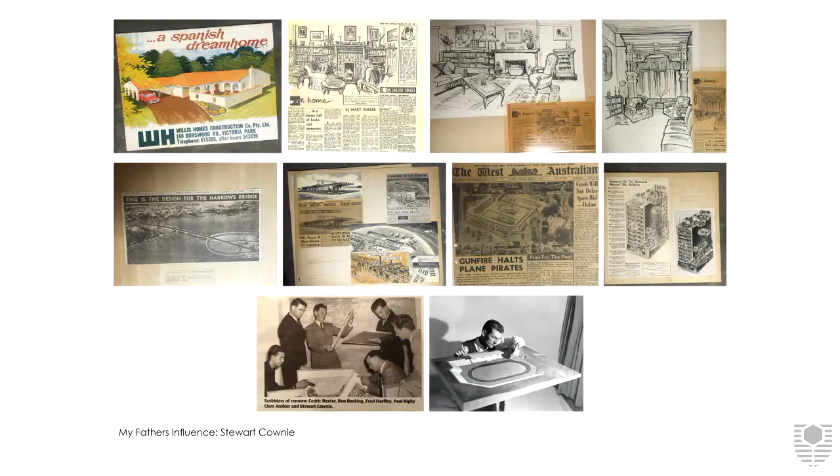The newspaper's art department included the political cartoonists, which meant that I had the honour of knowing personally the political cartoonists of the newspaper over the years. My father ventured into his own side career as a cartoonist with his Rodney series that he provided to an American newspaper for a time.

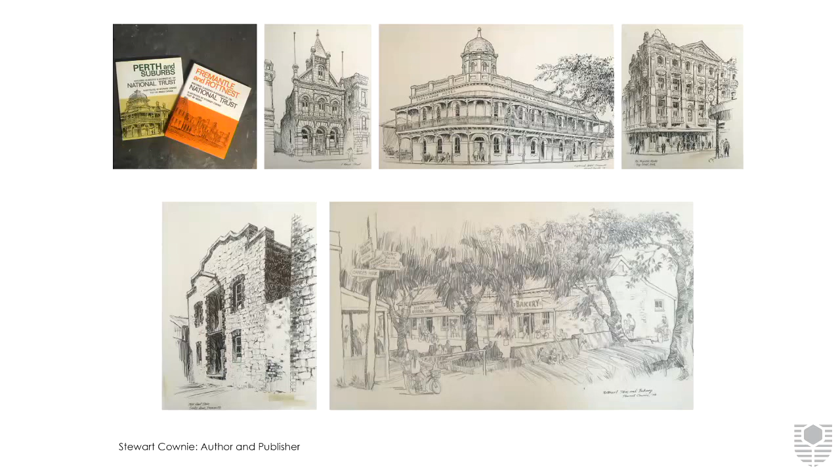Outside of my father's day job, he was constantly painting and holding art exhibitions. This took us to many country towns. He produced a series of books containing his pencil and ink drawings of historic places of Perth, Fremantle and Rottnest. He loved to research projects before he commenced the artwork.

When I was 6, our family travelled to Europe by boat for a holiday. I have many memories from this trip, or perhaps I can just remember the many post-trip slide nights looking at our travel photos.

Jumping forward to my days studying architecture at UWA, my first car, my first real job during the summer holidays as a brickies labourer, where I gained first-hand experience of construction sites. A few surfboards, a few student performances and competitive dress-ups. A memorable 21st birthday hippie-themed party.

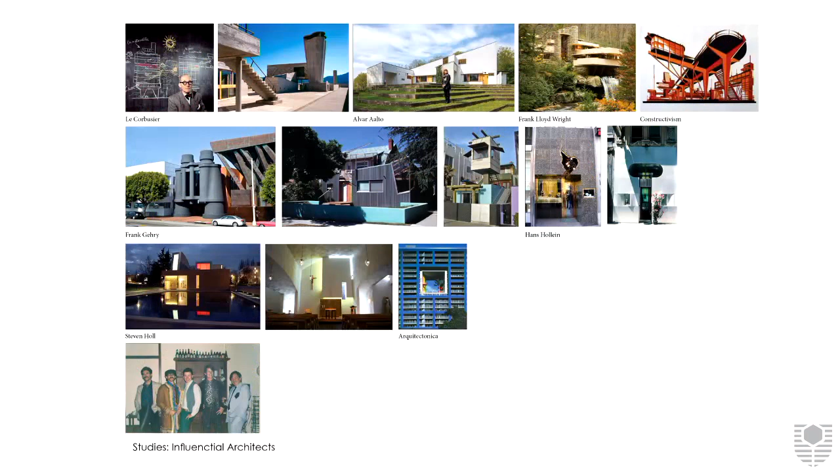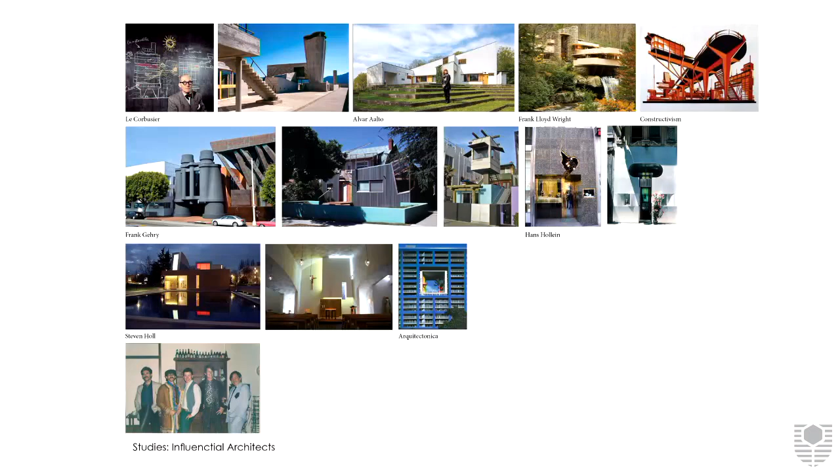At a time unlike today's endless supply of photos of architectural projects, I was influenced by books on the works of Le Corbusier, Alvar Aalto, Frank Lloyd Wright, and that of the Russian constructivists. I clambered over new periodicals to catch images of new work completed by the likes of Frank Gehry, Steven Holl, Hans Hollein and Arquitectonica. More dress-ups in my first job as an architect's office on finishing my studies, where I worked for 1 year before heading off to work in London.

5 fun-filled years based in London, working while taking lots of short breaks to travel. I was fortunate enough to work in a practice in conjunction with the architect Ian Ritchie. Ian started his own practice, Ian Ritchie Architects, in 1981, some 5 years earlier than my association, and earlier again at the office of Norman Foster.

At the same time, he had co-founded the design engineering firm, Rice Francis Ritchie, who were responsible for the bioclimatic facades of La Villette Sciences Building, the Louvre Pyramids and sculpture courts with I.M. Pei. Ritchie's fascination with lightweight structures was evident in the project on which I was working, Hermitage Riverside.

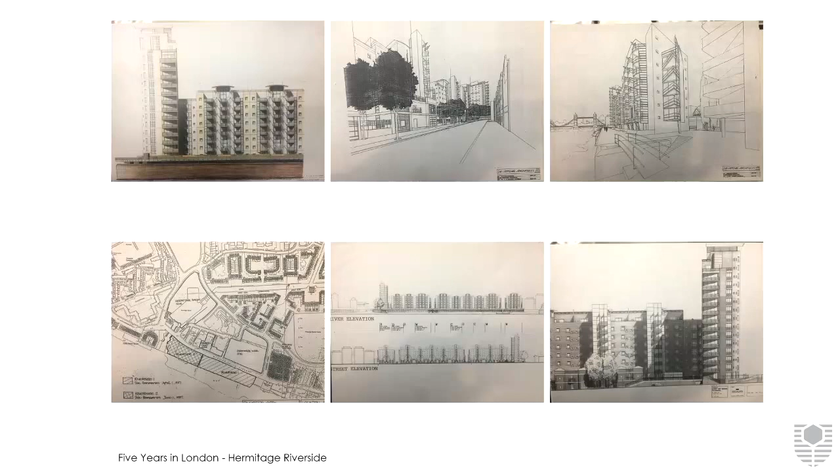The building was a residential apartment building on the edge of the Thames in central London, in which all of the lightweight balconies were suspended from above on suspension cables. We worked on this project from the design development to the end of the documentation, and unfortunately it was not built. What was interesting to me about this experience was the determination to not deviate from the design goal and Ian Ritchie's seamless working relationship between architect, engineering and industrial design.

I attended the World Architecture Festival in Amsterdam last year, where I had the opportunity to sit in on one of Ian's presentations to juries, on the Royal Academy of Music Recital Hall, which he completed earlier last year. It is the most exquisite building carved out of leftover spaces between historic London buildings.

After his talk, I reminded him of his project on which I had worked all those years ago. He remembered the project and very kindly said that he remembered me. I don't think he actually remembered me though, really.

Experiencing work in London was broken up with partying and lots of short breaks. Double denim, London digs in Brixton, and the beginnings of a romance that was to reignite later in life. A 4-week trip through Morocco and a crazy 5-week trip in my combi with 4 friends through France, Spain and Portugal. Back to work, this time on the proposed Hyatt Hotel and Conference Centre in Nairobi.

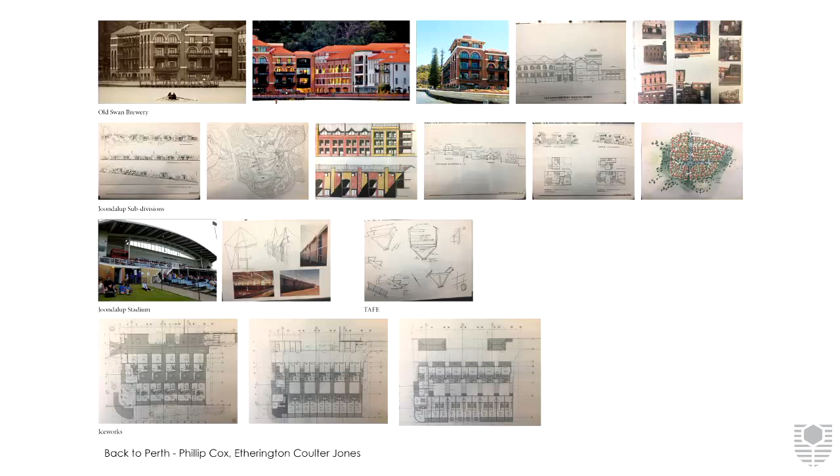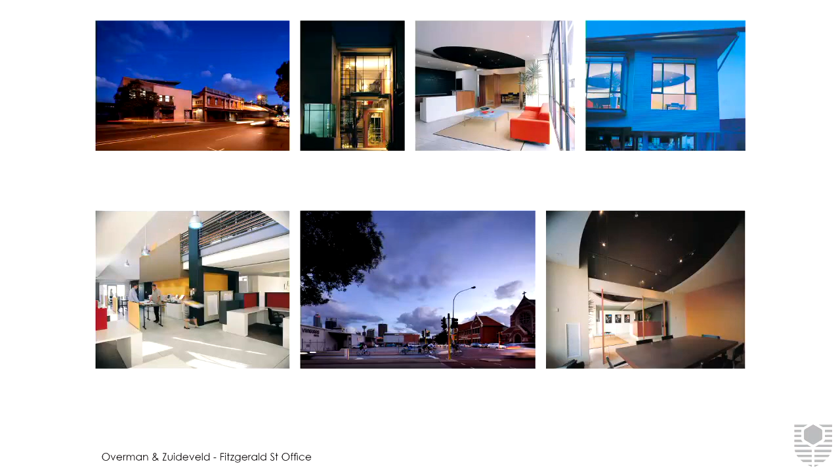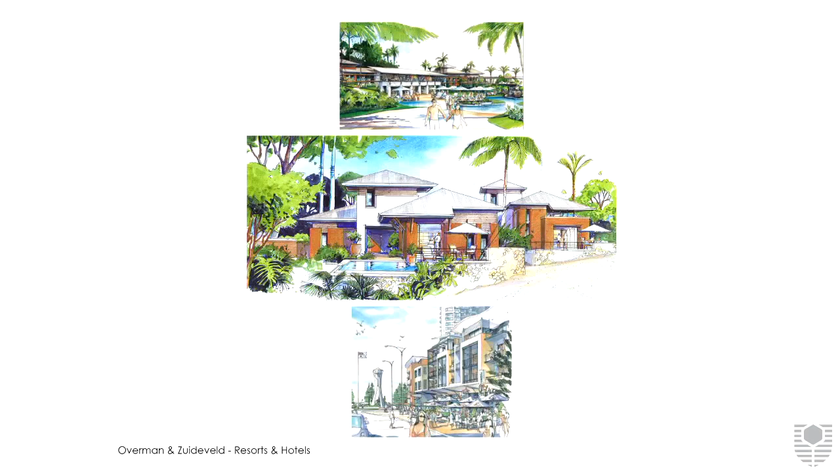Also designing the Upper East Side apartment building in East Perth, along with numerous other apartment and mixed-use buildings. Interiors for restaurants and apartments, resorts, hotels and day spas. Design of civic buildings, resorts and hotels. Housing subdivisions, new town centres and urban design.

Through this period saw marriage and children. A pivotal time of change, the end of my marriage, which led to a reassessment of how I wanted to live my life. After 10 years as director, an end to my time at Overman and Zuideveld, and a time to embrace new challenges, which my own boutique practice was commenced.

Then shortly after, the rediscovery of an old friend who turned out to be a life partner, and then blended families.

In the same way that I have just outlined what is specific to me, each new project, each new client, and each new site has things specific about them. I love bringing to life the hidden stories of place in each project, ultimately striving to provide a sense of belonging to occupants and buildings within community.

Maps provide the perfect analogy here. Consider the random division of Australia into states, where there is no consideration for division geologically, climatically or culturally. Then consider just how specific the map of 260 Indigenous nations division of Australia is, each nation specific to culture, climate, geography, flora, fauna and language.

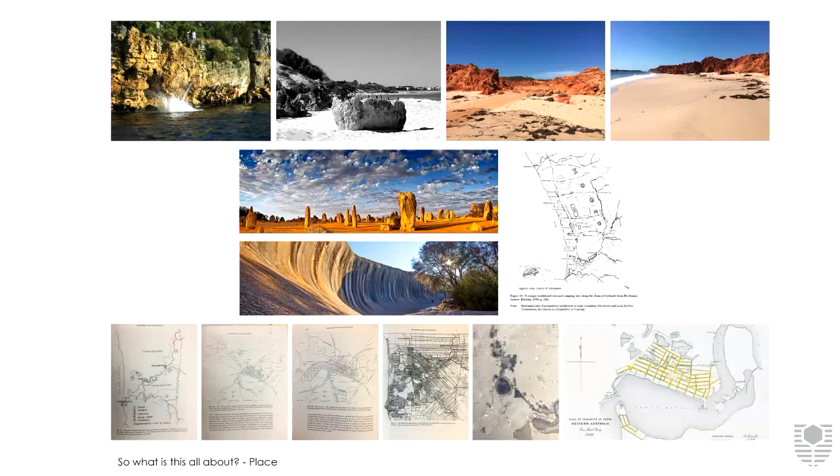Consider the opportunities to express place through materials specific to place within Western Australia, such as the limestone of the coastal southwest region, the granite of the inland Midwest regions and the Kimberley stone of the northwest.

Consider and get to know local history, such as Perth's first locations of European settlement, how the introduction of infrastructure such as train lines created new localities of development, and how the location and shapes of the first land grants were a major determining factor in the layout of our current road layouts.

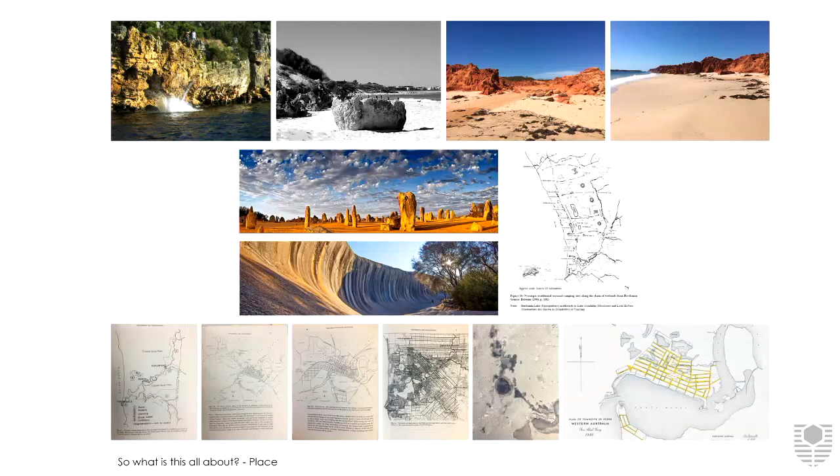Understand the significance of Perth wetland regions and how they were previously linked as one and served the seasonal movements of local Indigenous people. Pay respect to and be inclusive of our Indigenous culture with every opportunity.

These earlier projects of mine contain the essence of what I've been talking to date. The Leederville mixed-use building, which in my mind captures the essence of Leederville.

A house in John Street, Cottesloe, which pulls together aspects of Cottesloe, and Riverview, a house in Peppermint Grove that relates specifically to my clients who were combining English and Australian culture, moving back to Australia to embrace the great outdoors.

The design of a new suburban home called Roscommon House.

In the design of this new house and its interior, I endeavoured to make the family in the new building meld with and contribute to this unique suburb of Floreat.

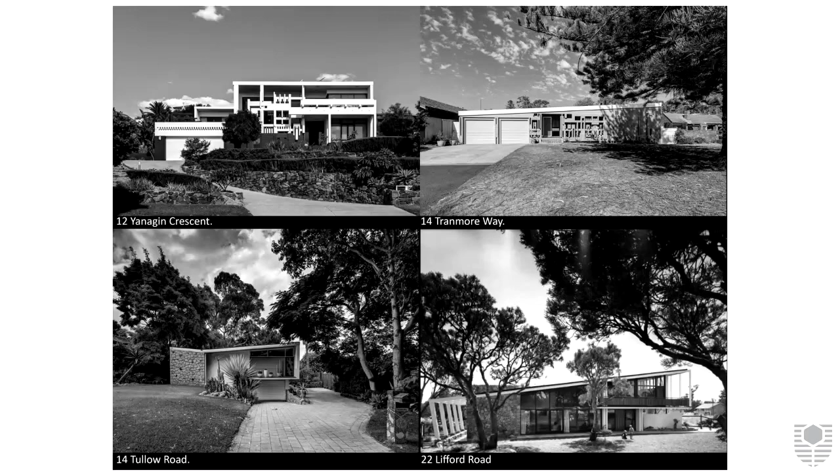The construction of the 1962 Empire Games Stadium and Athletes Housing Village in the locality was an enormous influence on the development of the new housing stock in the suburbs of Floreat and City Beach.

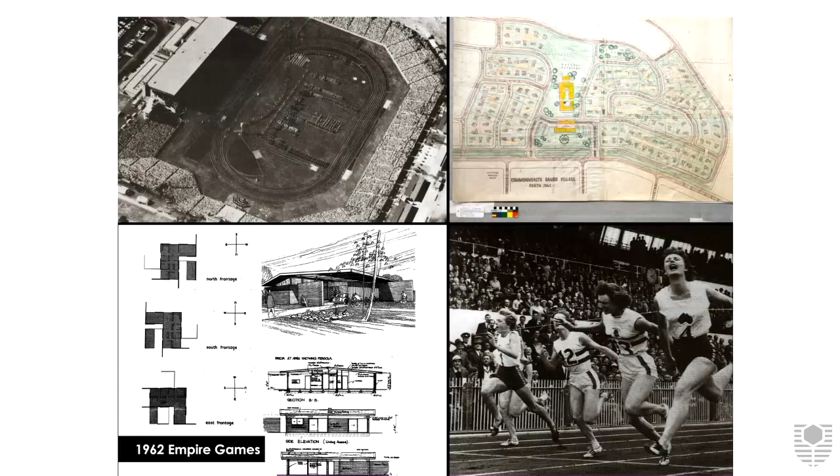As I began the design process for Roscommon House and its interior, the iconic concrete shell structure of the local surf lifesaving building was demolished, and the local council threatened to demolish the much-loved concrete beach kiosk. I took inspiration from these buildings to promote the long-term appreciation of the suburb's built history to the local authority and the general public.

I felt a responsibility to produce a design for this new house and its interior that not only served the needs and desires of my clients, but was also in conversation with the ethos of the suburb, without mimicking or replicating the past. And I must say that my clients were on board with this. It wasn't done independently of my clients' involvement.

From the street, Roscommon House presents as a sculptural play of masses, both heavy and light, transparent and solid. Simple, uncomplicated forms, as was the case with the original buildings of the area.

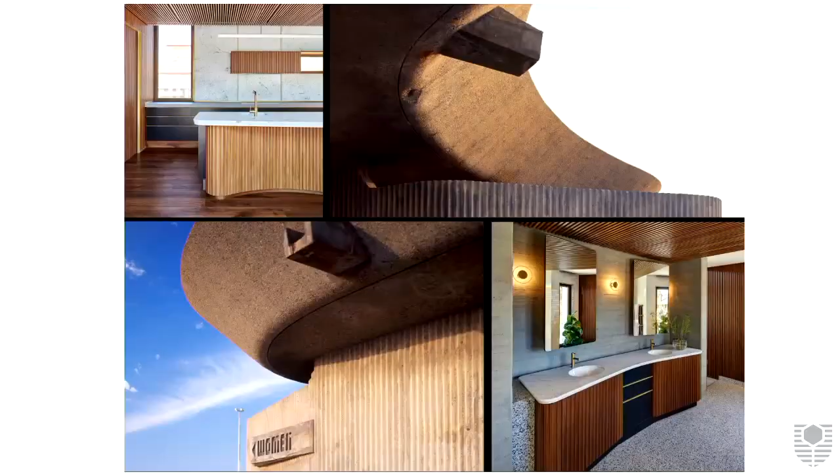The referencing and connections to the suburb and its history are not limited to the exterior, but run through the entire house. Here you can see the forms and vertical ribbing of the local concrete kiosk building influencing the interior cabinet work.

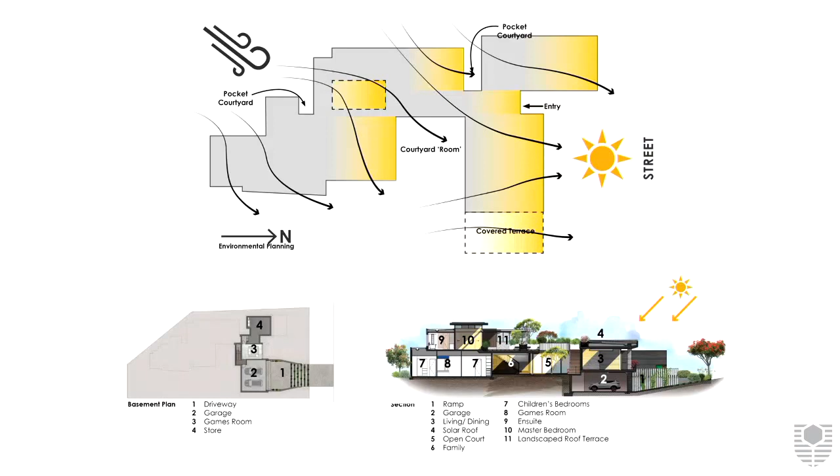Environmental designs drove the planning of Roscommon House, which has been teased apart to allow the winter sun and ventilation to penetrate the pocket courtyards of the building mass. These pocket courtyards also serve to reinforce the garden suburb ethos by bringing a connection to the garden into every room.

Both exterior and interior habitable spaces are designed to provide a feeling of containment and to visually connect with the landscape.

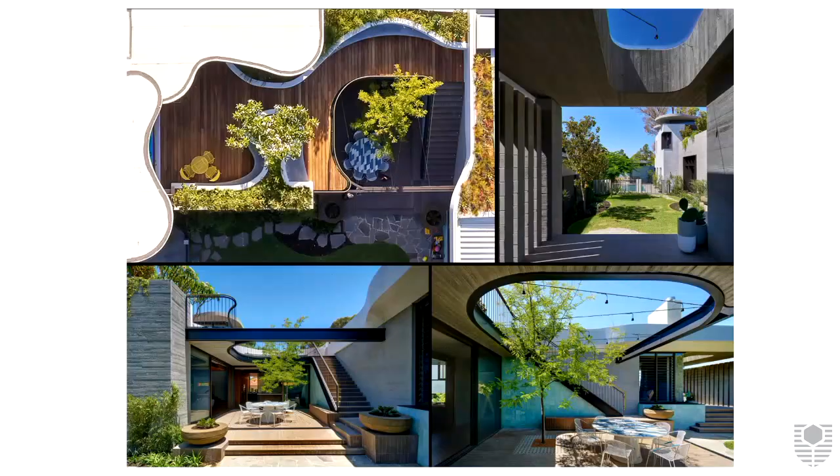Semi-contained external courtyards and terrace areas provide the same feeling of containment and sense of belonging as the interior spaces. Interior spaces transition to semi-outdoor courtyards.

The board-marked off-form concrete walls and ceilings slide through from the exterior to the interior. Materials have been chosen for their roughness, texture, modesty, and acceptance of beauty in ageing.

Matte finished timber and honed marble add warmth to the otherwise concrete walls and ceiling surfaces of the house. Brass has been used throughout the house as though it is a thread of jewellery, adding detail and richness, which over time will age and patina like a family heirloom.

The kitchen island bench evokes the sensuous curves of the local concrete beach kiosk, with its roof hovering above the ribbed walls. Walls and cabinet work blur into one.

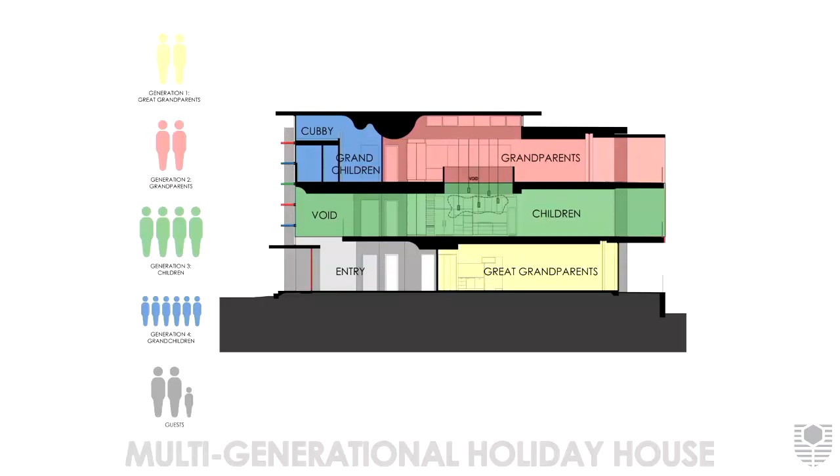That's one building, 4 generations of the one family on holiday by the ocean and marina.

And that's about 7 photos of me photoshopped together into the top left image there.

Cloud House in its setting as a bookend to the marina front houses, with public open space on 3 sides.

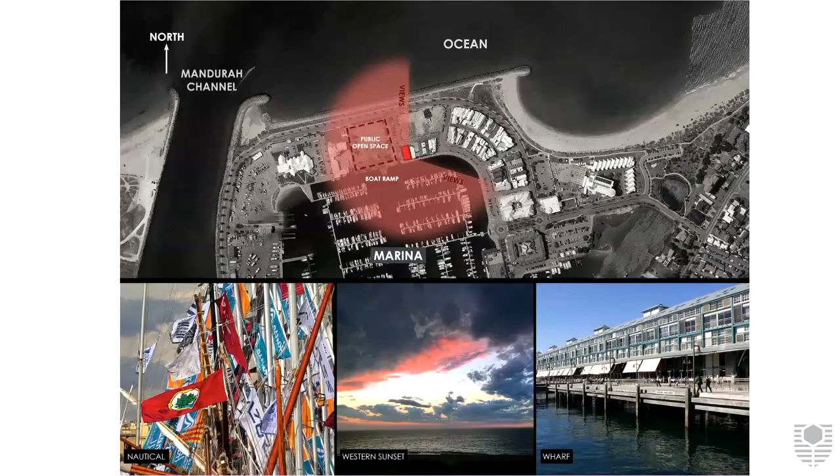The architectural language of the building draws upon its marina and oceanside location. Challenged at the outset of the project with an existing built form around the marina that paid no respect to place or environment, I looked further afield for a starting point to the scale and robust nature of the expressed structural grid of Sydney's Finger Wharf buildings.

Here you can see the building's referencing of place teased apart. This concrete exoskeleton of expressed floor slabs and columns became an honest expression of the building structure. The bold structural grid visually holds together the overlay of the other elements of referencing.

Referencing the colours of nautical navigation red, green and blue provided highlights to the projecting awnings. These colours were carried through to the referencing of the nautical flags and sails in the coloured external roller blinds.

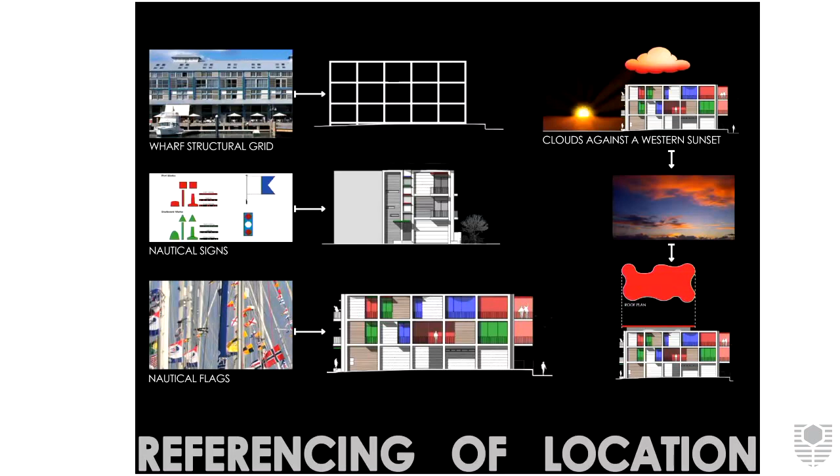Then finally the building is capped with the concrete red cloud that references the frequent dramatic sunsets over the Indian Ocean.

The coloured external roller blinds resolve the building's conflict of major views to the west, while dealing with the environmental factors of the sun and wind, along with privacy from the adjacent public open space.

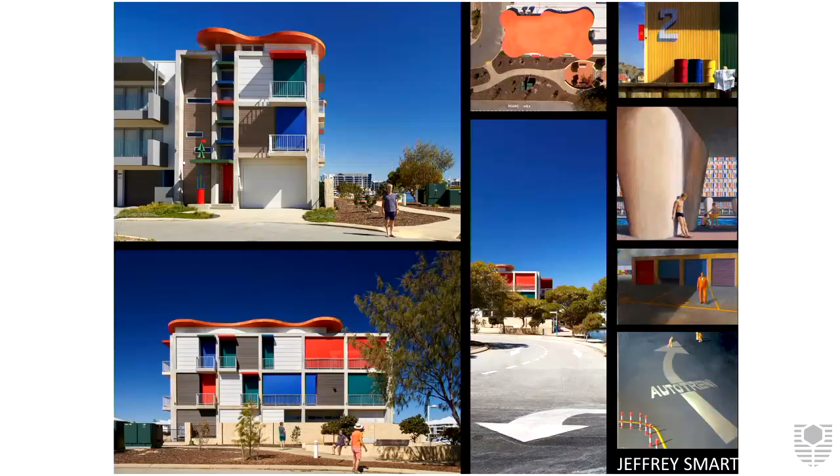The changing tapestry of blinds reflects the nature of the signals being sent by nautical flags. By night, the building is a navigational outpost, like a lighthouse, sending signals to the boats on the ocean entering the adjacent Mandurah Channel, which means the owners have to be careful which blinds are up and down as to what message they're sending to the boats.

The graphic nature of the external elevations play upon a referencing to the artwork of artist Jeffrey Smart, where the graphic qualities and the industrial and urban subject matter relates.

Local artist Tony Morgan was commissioned to complete sculpture.

The planning provided versatility of use for either the whole mob or just part of the family on holiday. The family zoning can be seen here in the floor plans across all levels.

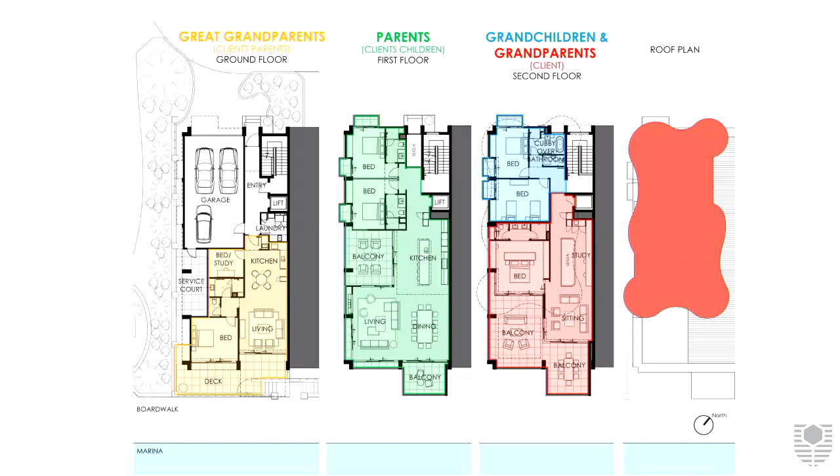Living spaces became part of the balcony through full height stacking sliding doors, level thresholds and consistent floor materials to make it feel as though you're sitting on a balcony even within the living spaces.

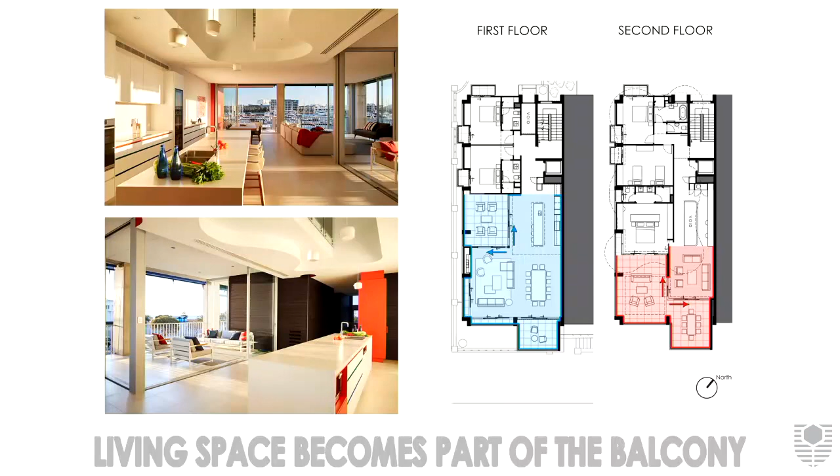Highlight windows allow morning to midday sun to spill through the central void space, to counter the fact that the living areas all face south and west to take in the best views.

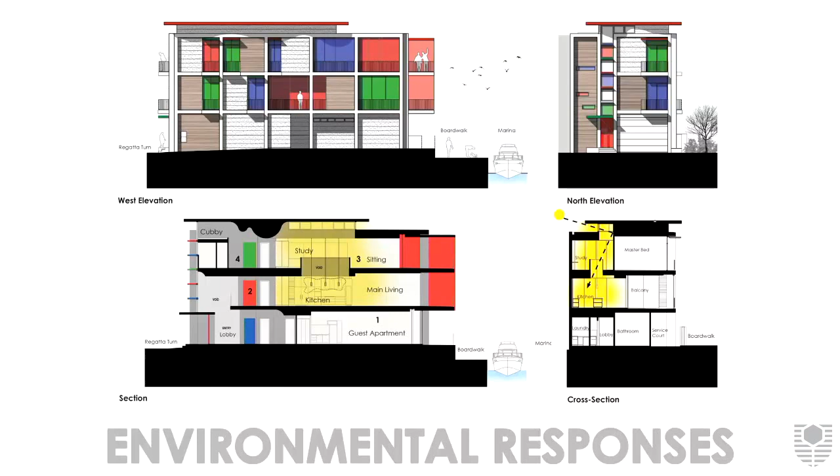The grandparent zone, which includes a sitting room that opens to its own balcony and study area, and void, which connect to the floor below.

The fun continues with ceiling profiles that roll like the underside of a cloud, and a ladder leading to the grandchildren's cubby house below the main roof.

If you have ever experienced launching a boat from a public boat ramp, you'll realise that boat ramps are places of high drama and theatre.

With the public boat ramp less than 50 metres away, Cloud House itself becomes part of the theatre and drama as it provides an ever-changing backdrop to the drama of the boat launching.

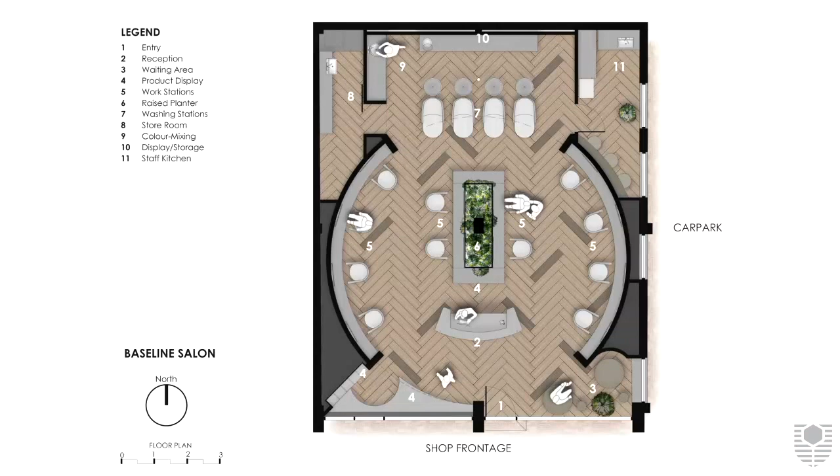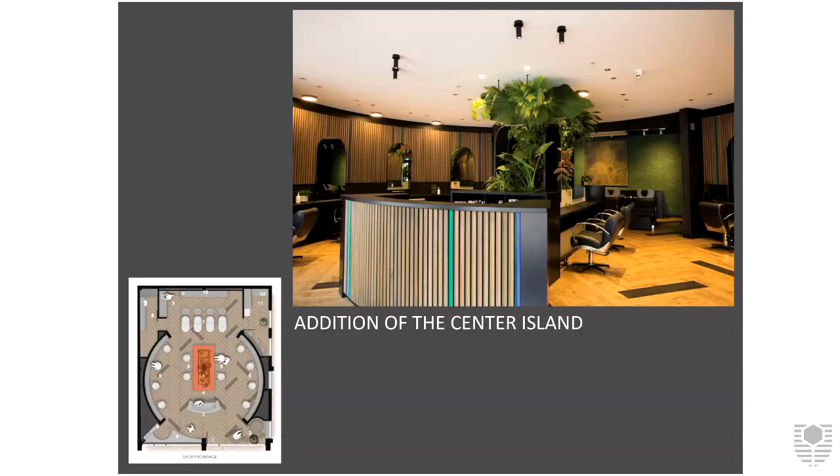The central island divides the circular space into smaller, more intimate subzones. The washing and colouring of hair takes place in the most intimate of areas at the rear of the salon.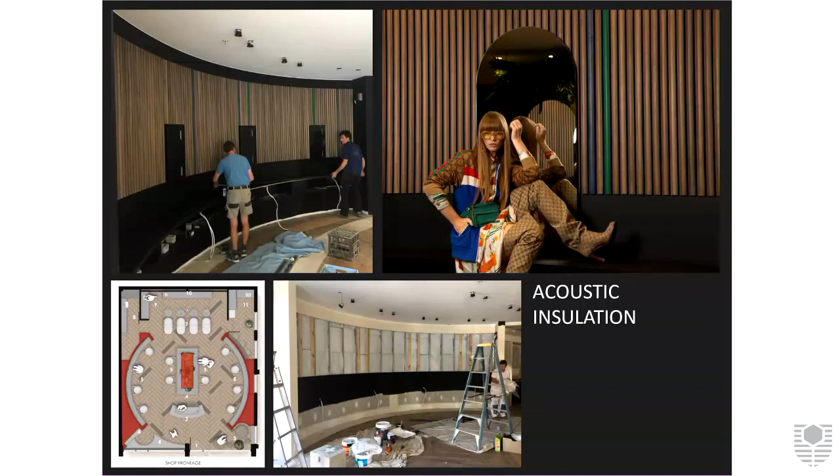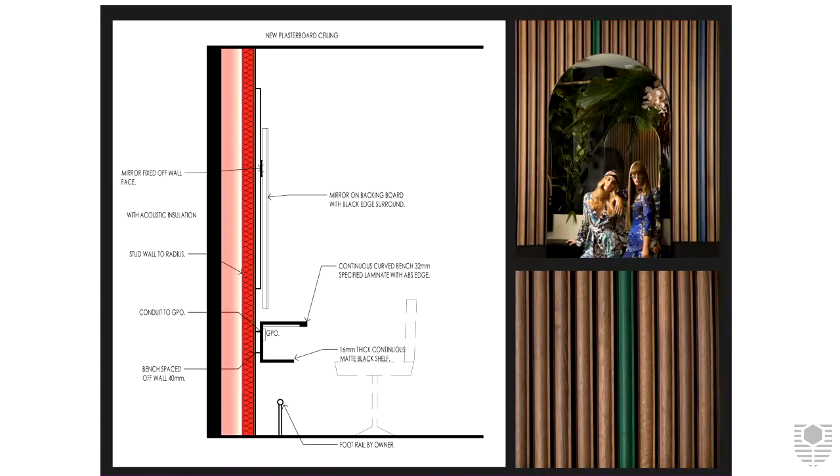To counter the noise of the many private conversations and hair dryers, the walls of the central circular space provide acoustic attenuation. The vertical hit-and-miss timber battens of the circular walls conceal the acoustic insulation behind. The wall and cavity spaces behind these walls are packed with sound-absorbing insulation.

The colour black features throughout the salon in order to make those black elements become recessive as a backdrop, resulting in the focus remaining always on the patron.

Accents of colour are found throughout the salon that reference the colouring of hair, in a celebration of the creativity of the hairdressing in the salon.

Wallpaper in the front of the salon draws together the colours as though they are from an artist's palette board. These colours spin out through the salon with the strands of colour in the timber battens and the block of green wallpaper as a backdrop to the rear of the salon.

The timber battens represent strands of hair, with the coloured timber battens being that of coloured hair. We specified a very limited number of these coloured battens to enable the message to be there without overcomplicating the space with colour.

The representation of hair starts outside the front door, with the custom designed pull handle resembling a long ponytail clasped in a metal hairband.

The end of each dowel was cut at a splayed angle, and each being rotated to reinforce it being an individual strand of hair. The scattering of black vinyl planks represents the splashing of stain on the floor, which is often the case as the result of colouring of hair.

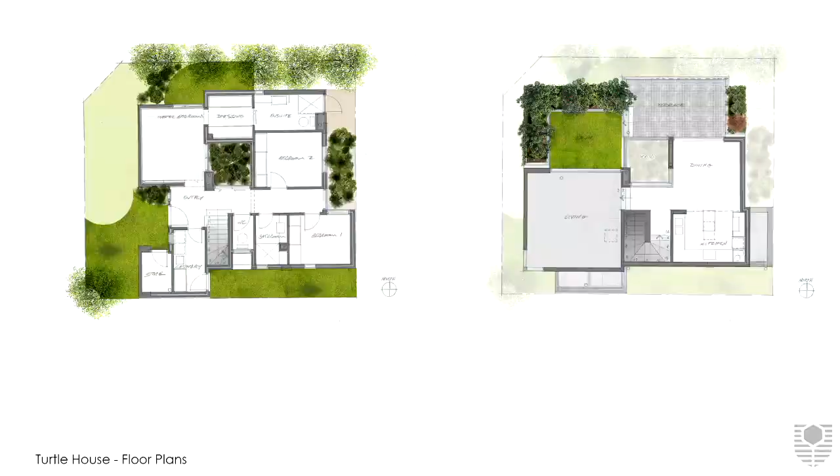The house, with a total area of 152 square metres, is only slightly larger than an apartment. There is no garage, not even a carport, as the family car has been provided for with an area to park over trafficable lawn adjacent to the laneway, which is to the left of the lighter green colouring on the left-hand plan. Simple yet playful use of concrete upstands and roof edges express the nibbling away of the swampland environment of the long-necked turtles of the locality.

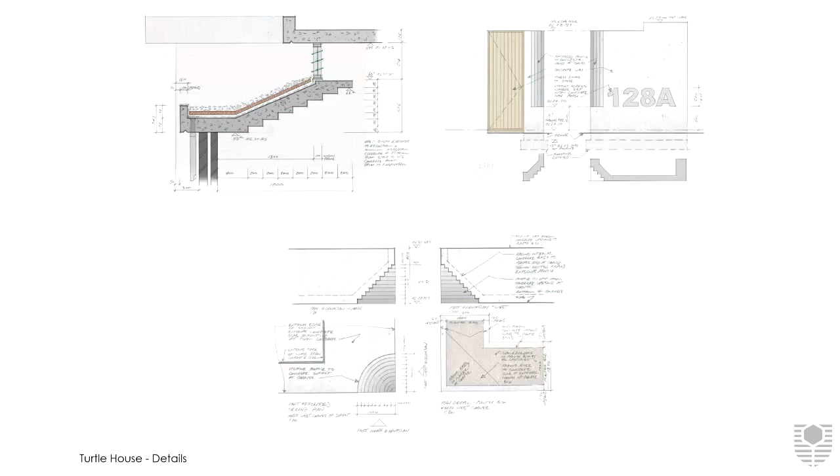It is intended that the landscaping will reflect the native swampland species such as the paperbark trees and reeds. Colours of the materials of the house have been chosen to complement the colour of the paperbarks, with a chalky off-white face brick and timber cladding that will be allowed to weather naturally over time to take on patina of its own. The yellow blossom of the tree will feature in the blinds that will appear and disappear, just like the blossom.